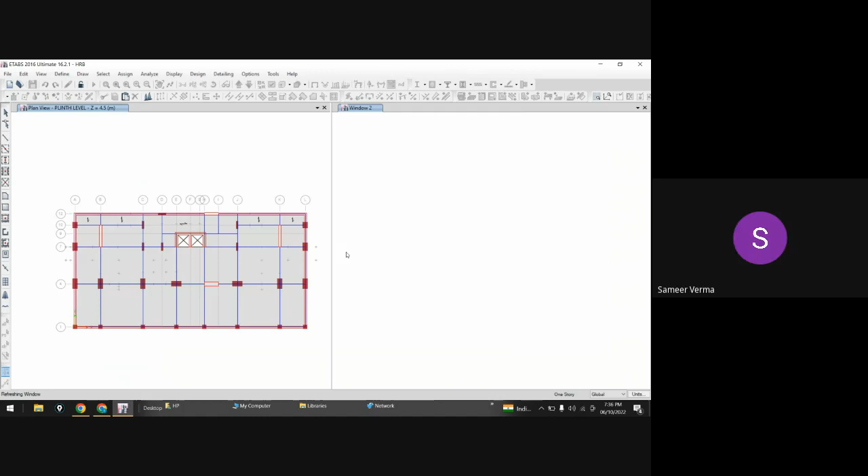Okay, how many of you have started and how many of you have not started yet? Started, sir. I know that Avinash and Sameer must have started it. What about others? Ketan, have you started?

No sir, I have not started this. What is the problem? What is the thing that you are delaying the process? Some problem may be there. Let me know the problem, because unless and until you start doing it yourself, you will never be in a position to see where you are getting stuck, and then I can help you. If you do not start, I just can't help you anymore.

Yes, what about Hema? Hello. Yes, why haven't you started? I started, but not this drawing. Okay, now see, my own problem was...

Don't worry about it. You can start with ETABS tutorials, whatever you want, but it is time now you should start with this commercial project G plus 18. Otherwise you will not understand where you are getting stuck up, and that's why I'm saying this.

And of course, Suleka ma'am, you must be busy in your routine work, but I will just say that you should start. Yes sir, I started but I stopped after doing something because of my office jobs. Yeah, I can continue, I understand that.

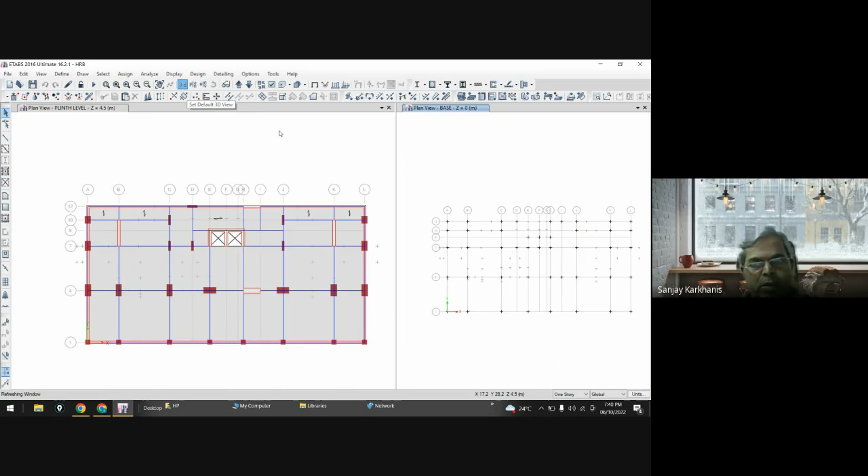So at base, I am choosing a wrong thing - I will click on this window, the left window, because I want to concentrate on the left window, and that left window is activated, and you can see this is the base. Now if you can see, all these plus points are nothing but the supports, and you can right click anywhere to see what the assignments are, under geometry it will be a point.

So you can see that it is a point having x, y, z coordinates. The coordinates may be anything, but it is that. And the connectivity to that point is of the wall.

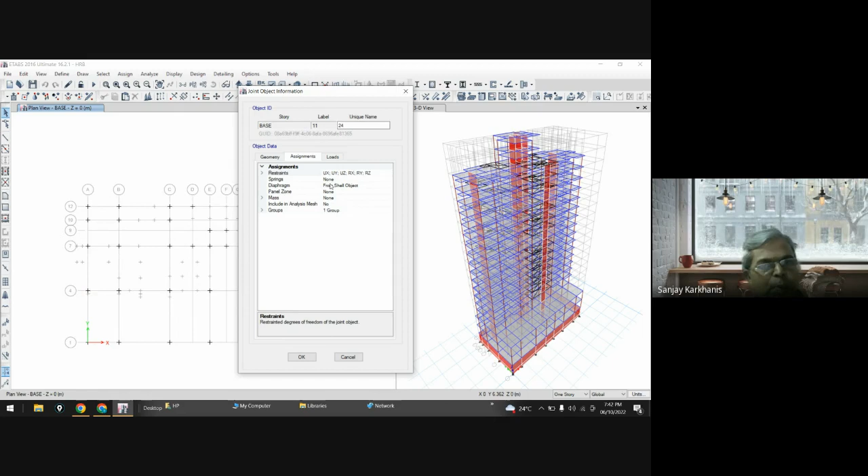So the point you have clicked is connected to a wall, W2, and you can check it over here. In assignment, you can see UX, UY, UZ, RX, RY, RZ, meaning it is restrained to move in X, Y, and Z directions, as well as restrained to rotate about X, Y, and Z. That is a condition we call fixed condition. So this way you can check whether you have assigned correctly or not. You can click anywhere on the point and check it. Here you must get a geometry as point assignment, then connectivity, which is the connectivity of the column or wall depending on the case. That's all about support.

Now all these supports are fixed supports, meaning maybe wall or isolated footing. So they are representing your foundation.

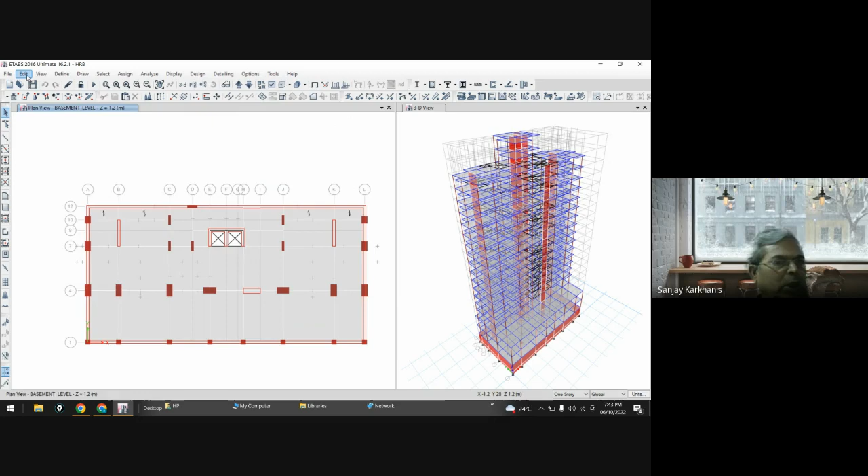Now above that, somewhere you can check the elevation as 1.2, meaning you are having base equal to 0. You can go and see this in edit stories, and if you go to modify story data, you can see all the stories like this. Now you may say, sir, I want plinth level equal to 0, so directly if you see the Z elevation, right now you are getting staircase cap, or let's say this 15th floor, you are getting elevation equal to...

57.7. Now if you want this to represent the height from ground, you can do it like this. Let's say I click over here, which is my plinth level, as 0. Then this one will be minus 4.5. See, at plinth, if I see over here, I am getting 4.5. Now here I want 0, so I will change it to minus 4.5. Clear?

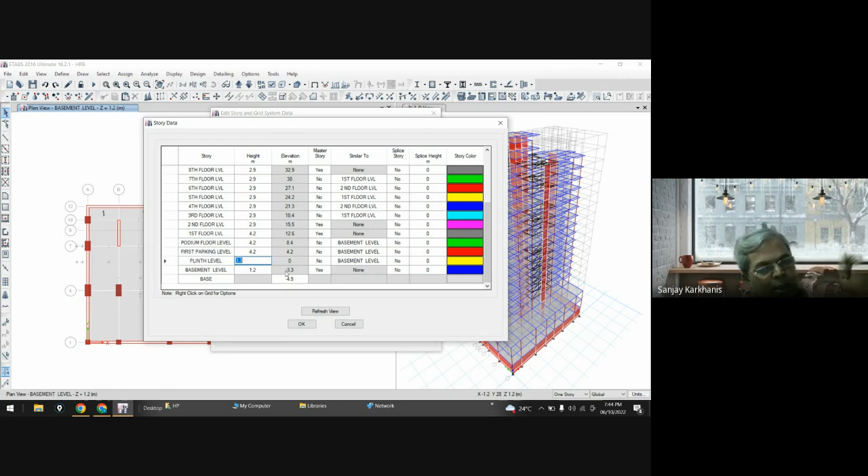Yes sir. Now see, this 1.2, 3.3 as it is, and now you can see that your base is minus 4.5, and your basement level is minus 3.3. Now if you go back in your architectural data and see the elevation, you see that your basement is minus 3.3 and ground is 0. Clear?

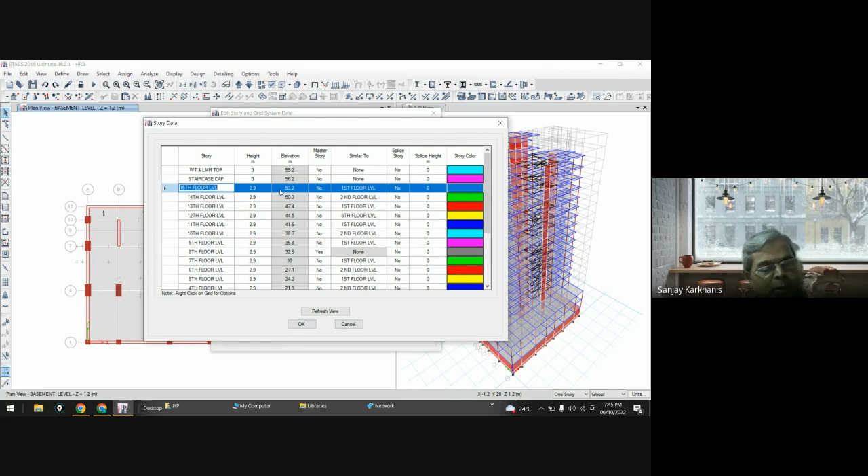Clear, sir. Now the advantage of this is that directly if I go at 15 story, I will get the height of the entire tower for calculation of equivalent height, that is h, to calculate VB. And you can recollect that Ta equals 0.09 h over root d, so that h I will get directly over here. I don't have to go for some addition, alteration, etc. Right?

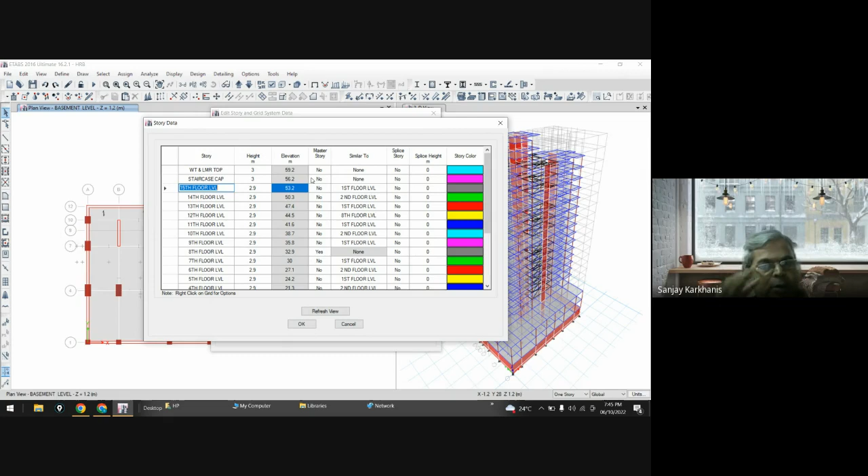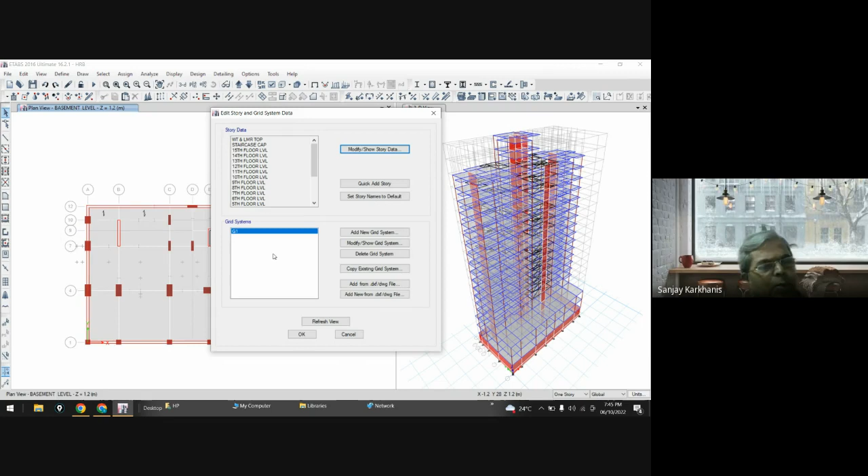Yes sir, yes sir. But this is optional. It doesn't have any reference with your analysis. The only thing is whether you can say your ground is at 4.5, and then you can find out the elevation height minus 4.5, that will be your height of the building. Either you can do it manually or directly convert it in ETABS by giving RL equal to 0 at plinth, and below it will be minus and above it will be plus. So that is a simple trick, and that's all.

Now here you can see at the basement level, you are having the columns, and the columns are not tied because we are not considering any uplift pressure due to water level. But if you want, then you can add the beams into this, so column to column connection, you can connect all columns along with this floor to form...

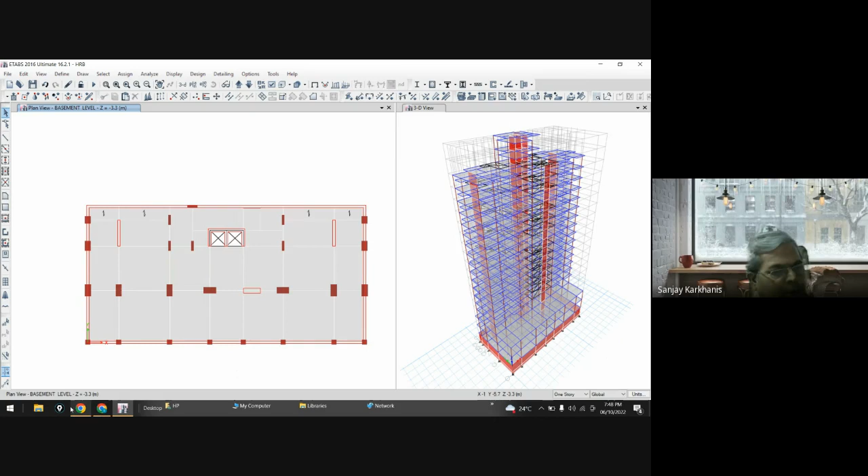Then diaphragm is also assigned. Then you can see over here any other assignment. Right now other assignments are not that important, they are actually carried as default. Then under loads, the live load, under live load pattern you have defined 2.5, and under SIDL pattern you have defined 2.2 kilonewton per square meter as the intensity. And where has this 2.5 come from? Anybody? Live load IS 875 part 2. And why is it 2.5?

See, this is the basement, and on the right side you're having a ramp that goes to the basement. That means you're using this basement for parking—light vehicle parking. So you have to consider IS 875 and see the live load recommended for light vehicles. Why light vehicle? Because in this building you are not going to park trucks and lorries, you are going to park cars, and parking of cars comes under light vehicle parking. Clear?

Yes sir, so under that category you will find 2.5. I think that was explained to you, and I'm just repeating so that if something is missed by you in earlier sessions, it will be recollected. So you can click anywhere and check that 2.5 and 2.2—2.2 is only considered because you may be providing cement blocks or something. Based on that, we have provided 2.2.

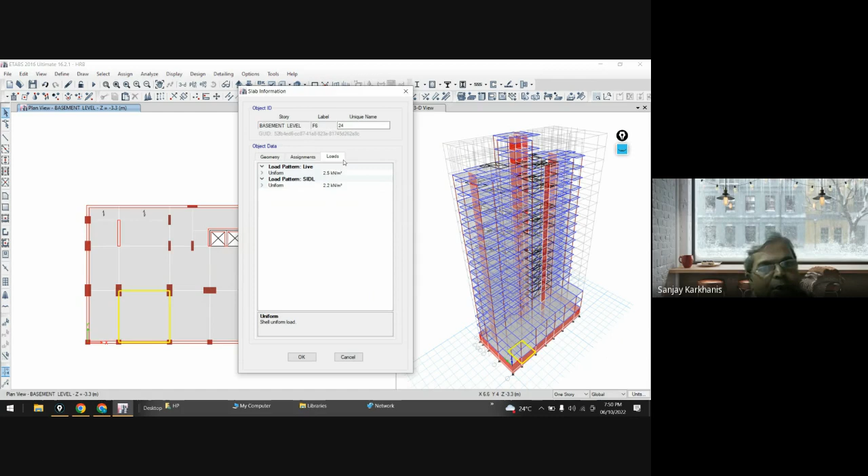So this is one way—every individual element you can check, or you can directly go to display. Under display, loads assign, and under that shell, and under shell you will see a live load category. So here you will see everywhere, under live load category, it is equal to 2.5, and this is your stair area. Here you may provide 2.5 or less than that.

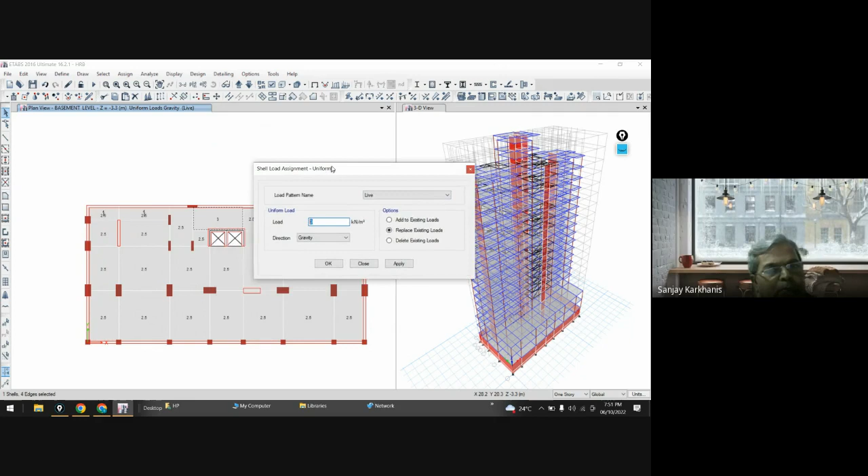Actually this is incorrect, because under this staircase you are not going to provide any car. So you can reassign it. How? Select it, go to assign, under assign go to shell loads, under shell load go to uniform, under uniform go to live load category, and there I will provide the live load category—since this is an inaccessible area I may provide 1.5, but for safety I will provide 2.0 instead of 3. Clear?

Yes sir. Because, try to understand this—this is your basement. From the basement you are providing a staircase, something like this. So under any case, this area is not at all available for parking, right? Yes sir. So that means the light vehicle parking load you should not provide, because you are not going to park any vehicle below the staircase, and that's why I have reduced it.

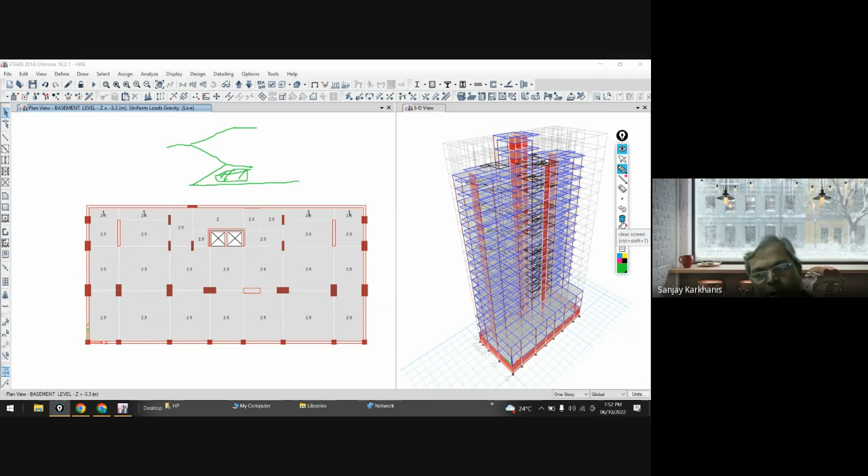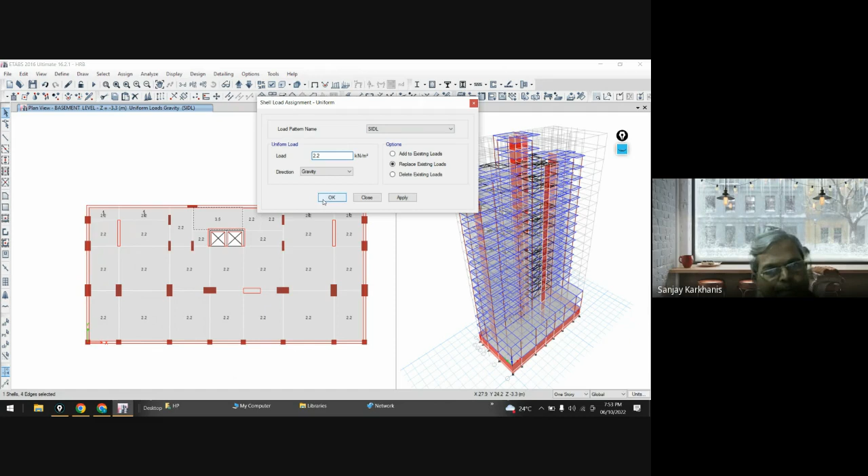So this way you can correct the things also, and that is how you can check your model after completion. Then you can again go to display, under loads assign shell—now this was live, now you can go and see SIDL. What is the case for SIDL? Everywhere you have considered this, and this has been considered as 3.5—actually this will be 2 only, so 2.2 only. You can make it like that: assign shell load uniform, and under SIDL you will provide it as 2.2.

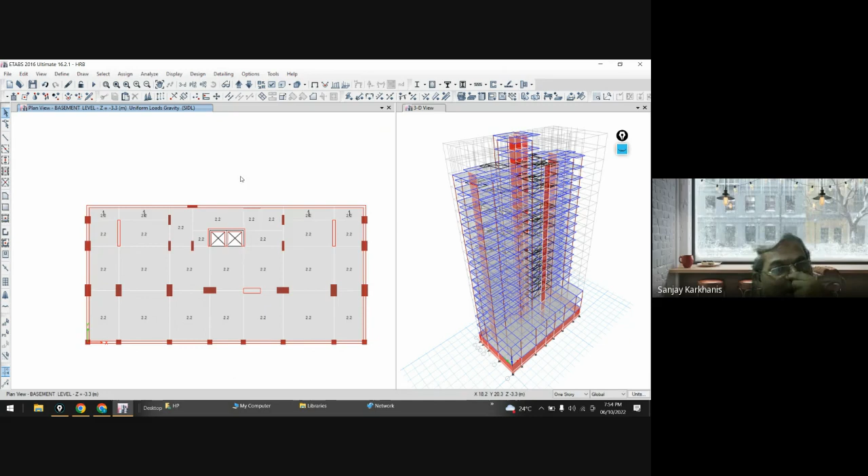Okay, so this is all about the basement. Now what about the beams? You will see that the periphery has a retaining wall, fully from basement or footing up to the ground level—you are having this RC wall. That means there is no way, or you should not provide any loading on that, and the self weight of that element, as it is a structural element, will be automatically calculated by ETABS at the time of analysis.

Then you can go one step up—now this is your ground level, right? So what is the situation at ground level? The same situation—ground level is also used for parking, and here you can see this is your staircase. So here you use category 3 for live load, and 3.5 for SIDL, that is weight of the steps etc. You can calculate and assign that. For the rest, SIDL is 2.2 and live load will be 2.5. Again, what about this?

What about the wall? Or what about the frame? It is now composed of beams, and under beams you will see that we have not provided any loading. Is it correct, or do you want to make some changes into it?

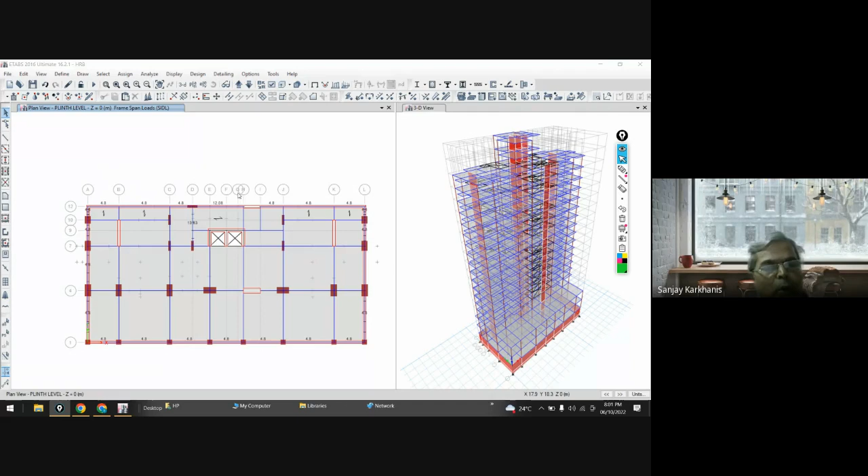So whenever you have some doubt in your mind about the magnitude of load, or about whether the load is there, you should consider it or not, then always consider it instead of not considering it. Because then if finally there is no load, then your estimation will be on the higher side. And if there is a load due to wall or any other thing, then already you have considered it, so you are always on the safe side.

So that is the advice based on structural criteria. But if you are going with the economic criteria, then your criteria will change a little bit. But that is not the case here. You have to go with safe considerations. Okay.

Yes sir, if you see this, this load shall not be there because there is an opening for the lift. So here also the opening is not considered, you can consider that.

Now you can see this is your first parking level. Again here also, as it is a parking or first floor parking, only periphery loads are available, and the periphery will have a loading of parapet wall, which you may consider made up of RC material or some other material.

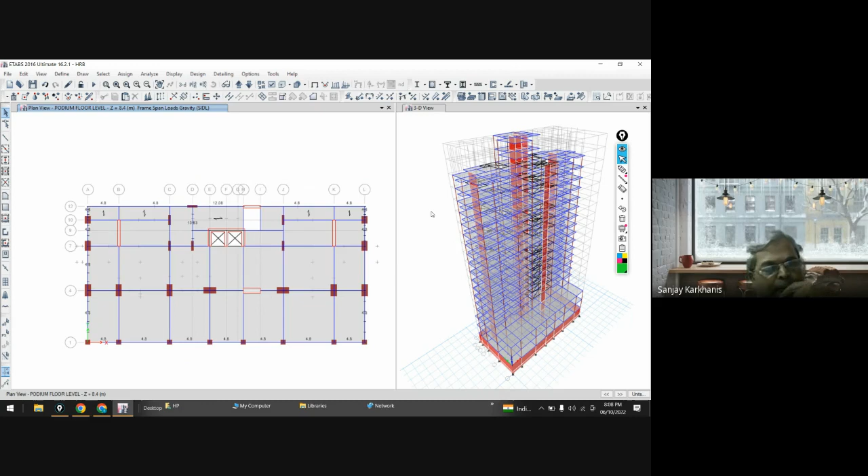Yes sir. When you saw that architectural drawing, you might have felt this is beyond me. Now you can see how simple it actually was. It was not complicated at all, it just looks complicated, and that's what I always try to highlight: things that look difficult are not necessarily difficult. Never feel that whatever seems difficult is actually difficult. Actually it is easy, that's exactly why it looks scarier than it is.

Yes sir. Okay, then we'll go one step ahead. So this is about the podium floor. Now here you can see it starting, and this is also to be deleted. So at every floor you can delete that.

Now you can see the first thing. First I will assign clear display so nothing extra will be shown, and then I will try to see the loading on the flat. Now you can see this is one flat, this is another flat, and this is the opening over here. This is a common corridor, and these are the alternate terraces. So I can go and see things with loading.

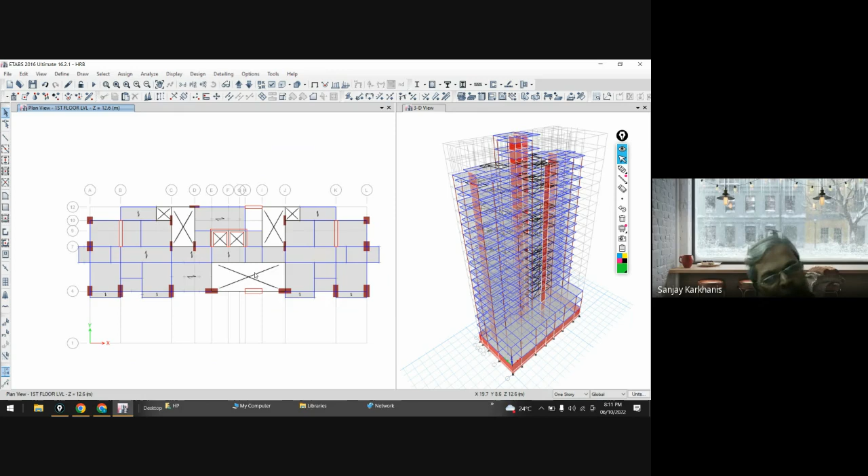Now yes, let us go and see the section. If you want to see the section, you can right click and go to assignment. So this is S135, a slab of 135 thick. Then if you go somewhere here, you will see it is again a slab of 135, a two-way slab.

And if you see the slab for the staircase, the staircase slab is ST200, or you can check this. So this is again a one-way slab with 135, and you may design the slabs and place the depth accordingly. It's not necessary that every depth is considered as 135, because you may decide this slab doesn't need 135, so you can provide 125. But if you want to provide the slab as 125, you will have to check whether you have defined it.

So under section properties, under slab section, I can see that I have not defined it. So if I want 125, I will have to define that slab as one-way slab 125. And again, you can go back and see the GA drawing, and whatever has been considered on the GA drawing, you may apply it over here. Right? Clear ho raha hai?

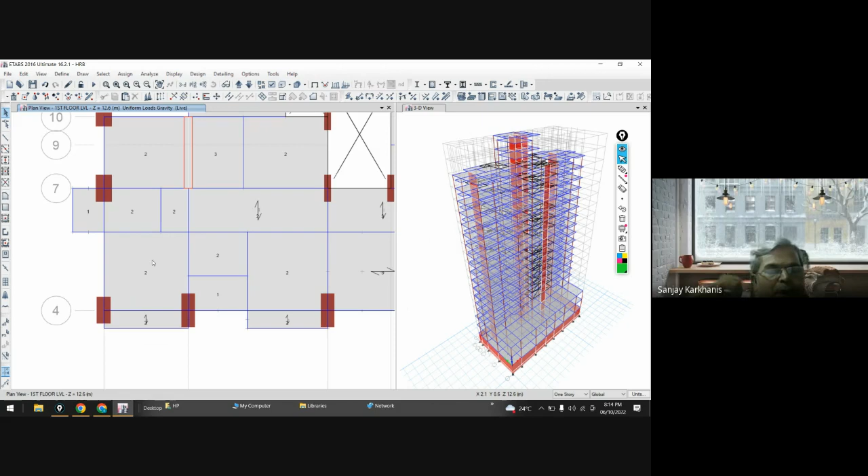So if you go and see the codal provision, the code says that if the area of the slab is something like a chajja, and it is inaccessible, then you can provide live load intensity of 0.75. We have not gone for 0.75, we said let us keep one step higher, and that's why we have considered it as 1.

Okay, then this is bathroom, so everywhere in bathroom we have considered it as 2, and balconies - now these balconies, it depends on you how much load you consider on them. If you consider the balconies susceptible to overcrowding, you can go for 3, otherwise you can consider 2. Again it depends on you - if you consider 2 it is okay, if you consider 3 it is still okay, right?

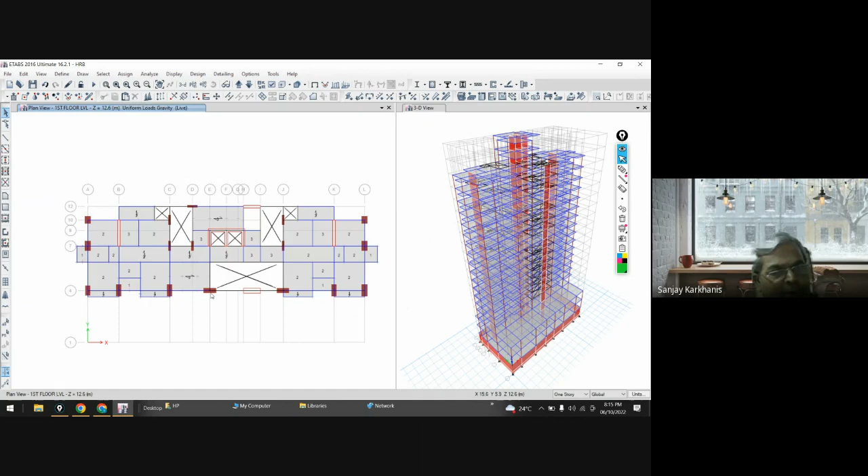Yes sir. And this passage, that passage, you can see we have considered live load equal to 3. So this is the passage, then this is your staircase. So the live load assigned to all these floors is correct.

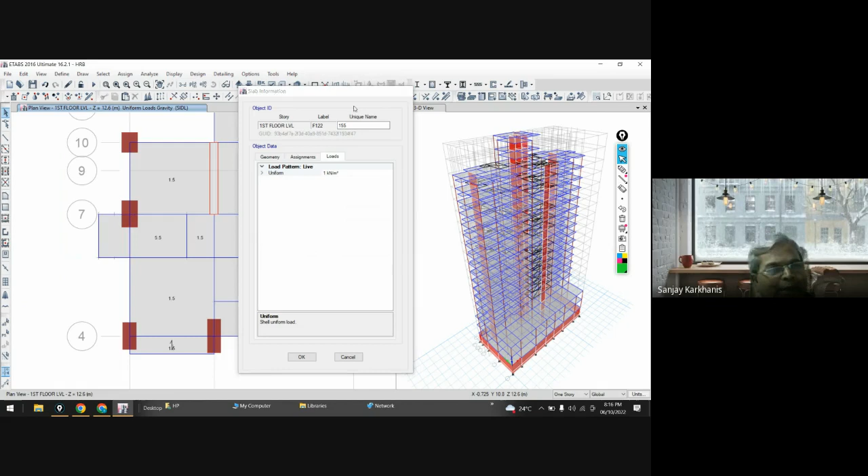Now you can check the dead load assigned to shell. Under shell, you can see SIDL, and SIDL will be a little bit different. Here SIDL is considered as 5.5, while there is no SIDL on this slab. You can check, there is only a live load, no SIDL, or it will be very less, and that's why we have not considered it in these areas. You can check the drawing and you will see that here there is a ledge only for placement of your

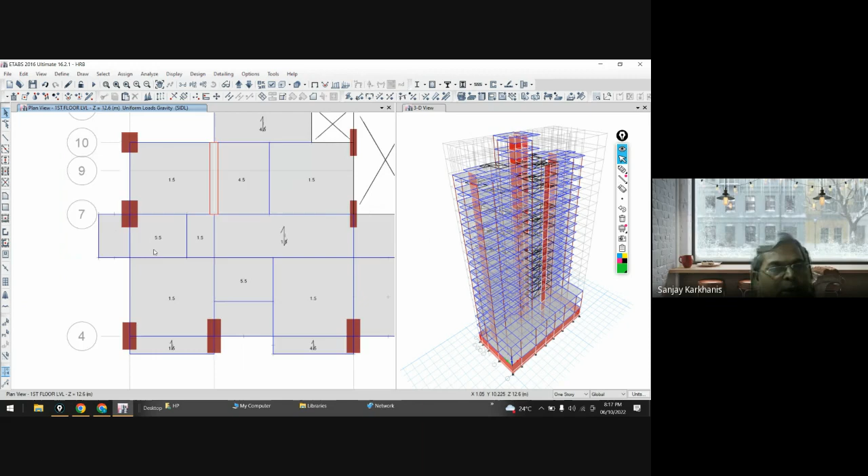AC instrument. And then in the balconies, you can see 1.5. Then this is a dry balcony, that's why it is 4.5. This is the bathroom area, it is 5.5. You can calculate and place your load as per your calculation.

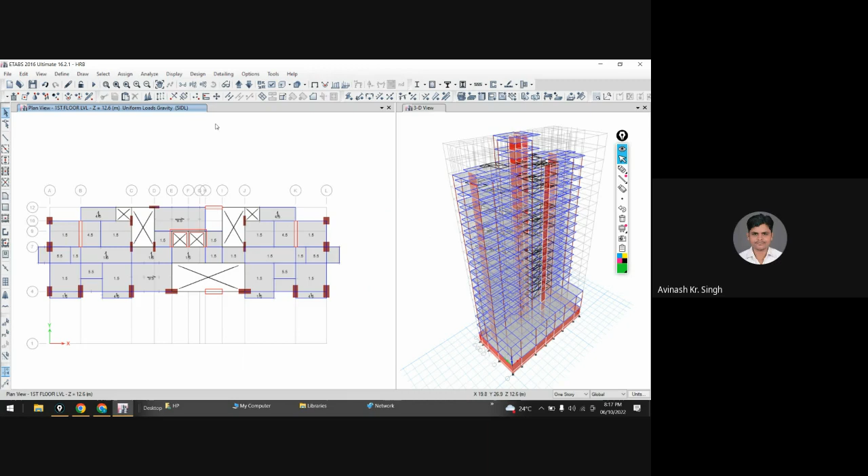So it is up to you, right? The only thing is that whatever loading you are considering, you must be in a position to justify it, right? Yes sir. If someone asks you why you have considered this, you must have the justification. Now whether that justification will be accepted or not is a different thing. But you can say, according to me, I have applied the loading because I consider it like this.

Okay, so similarly you can go and check the loads assigned to frame sections. Under frame sections, only SIDL has been applied, and you can see the SIDL. Everywhere SIDL is different. If you want to consider exact things, you have to correlate this loading with your architectural drawing, whether there is a wall or not. If the wall is there, what type of wall, what thickness, and what is the height of the wall, whether it is a parapet wall or a 50% wall. Accordingly, you can find out.

Now you know the input DBR, we have gone through it in very detail. So you know how to find this out, and don't go for 3 digits, that is not at all required. Why it has been considered, I don't know, but don't go for 3 digits. So 7.5 or 7.2, whatever, one digit is more than enough. Don't go for 3 or even 2. That is just your academic consideration, and it has nothing to do with practical things.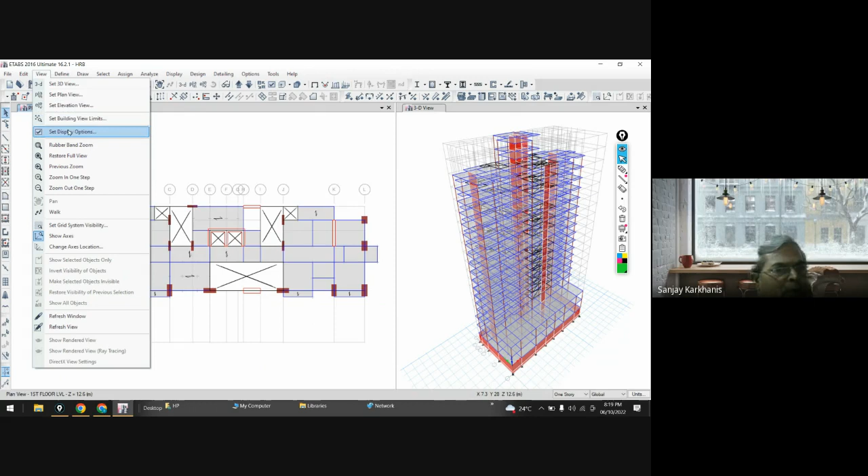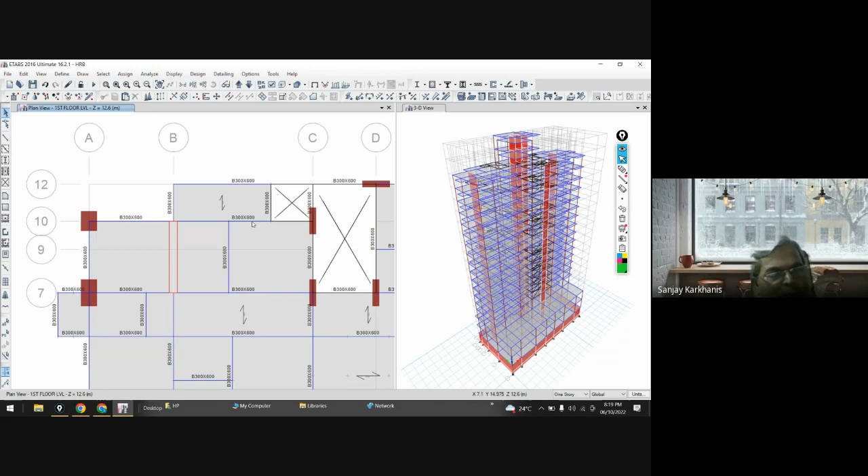First I will clear the display of assign, and then go to view and set display options. Under display options, under object assignment, and under frame assignment, I will go for section, and I will see the various sections. So the beam, beam 300 by 600, this is the exact name that you have provided under section properties, under frame section, all these names, whatever you have provided.

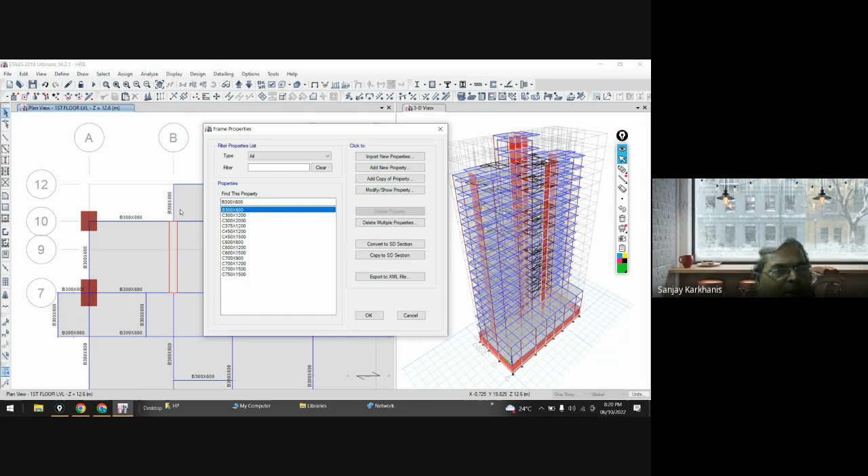So if you provide a name over here, something different, then it will appear like that. So if I consider this as B1, it will show you B1. Okay, so name of the section, right? So label is different, section is different. Let me show you that. So display options, object assignment - see the section is different, and if I go for label, the label is different.

Now who is defining the label? Program ETABS, who is defining the label? ETABS program. Yes, now you are on the right track. So the program will decide the name.

The only thing is, whenever there is some error and the program says that one beam B1 is overlapping with B4 also, that time you can consider. So this is my B1 and this is my B4. Now let's say in my drawing, instead of ending here, it has ended somewhere here, and this beam has started over here. So there will be overlapping. That overlapping is detected by this program when you ask it to analyze and check model - that time it will give you the errors.

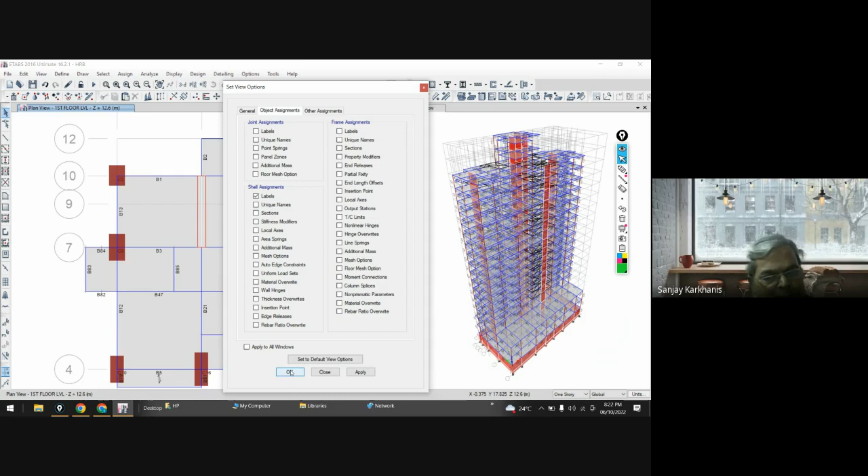First, I will clear this label, and then under shell assignment, I will click on this label, and you can see here now F74, F116. These are the labels at the time. This is how your drawing has been performed. It's not necessary that if you see F25 here and you are creating your drawing, it will match, because how you draw, or what is the sequence of drawing the slab, accordingly the labels are considered, right?

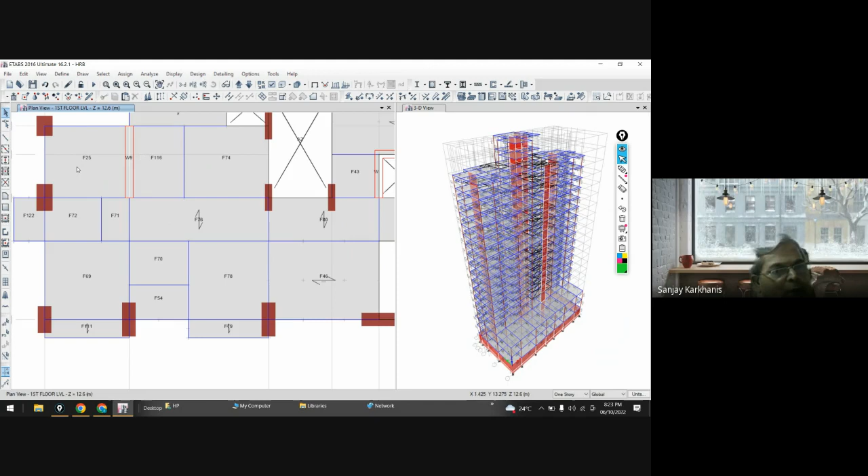So I cannot say why it is F25, because this is a label that has been monitored and controlled by software. So it is not in our control. Don't worry about that. You can say that this is F25, that is a slab. And you can check the assignments, you can check the geometry, and you can check the loads.

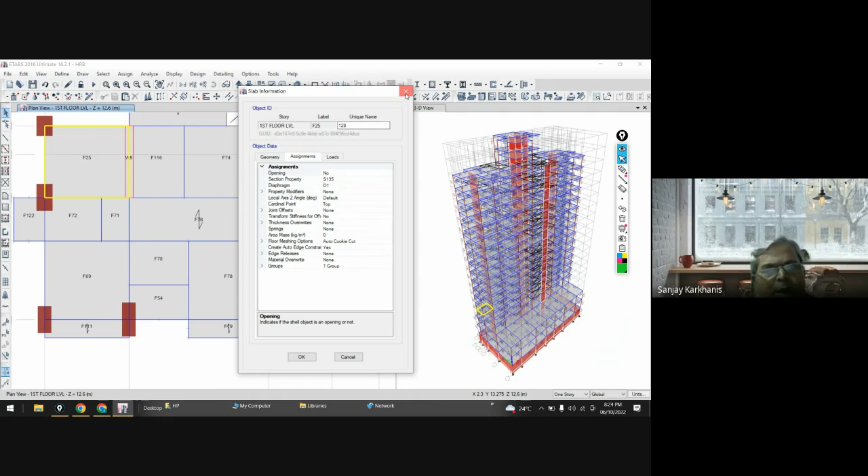And here you can see that F25 is coming. Then unique name is 128. Then the label has been defined as F25. And what is the name of that slab? The name of that slab is S135.

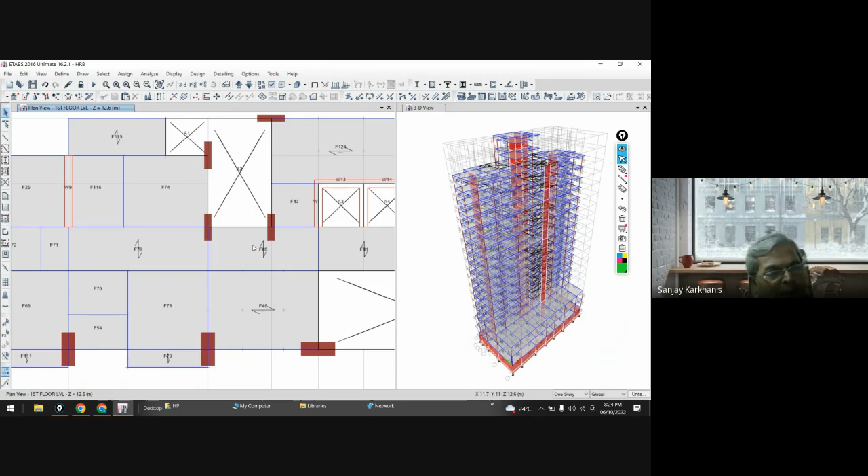So why I'm showing you all these things, because these things you will not find in any YouTube video or book. You will find n number of things, but nobody will tell you what is the meaning of this, how it has been coming. All that you can get only when you will go to this help and go to frame object or shell object. There you will come to understand how this is coming or what is the meaning of this.

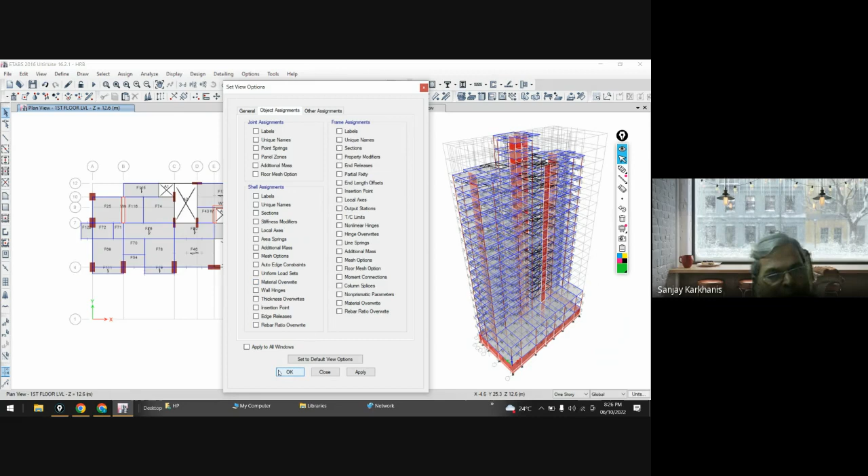Okay, then I want to remove this, so I will go to set view options. Under display options, under object assignment, labels, I will clear that, and you can see it has been cleared.

So this is how you can have the loading. Similarly, you can go and see, except this, everything is same. Now again you will have to delete it, right? So what I will do, I will go one step up, to this one story instead of all story, and then I will select this and delete so that everywhere it will be deleted. So we were over here, so it is second floor, then second floor will be also identical.

So I will not waste much time into it. You can verify everything, or shall I let you know? The only difference is this, with this L - now this is L and this is slab. So this is void and this is slab. And if you go below, this is void and this is slab. So that L part is different. Otherwise, everything else is same up to.

You can go ahead and see the eighth floor. Now this is your eighth floor. And now the eighth floor is having this. So you can check, this is the only slab that you are going with.

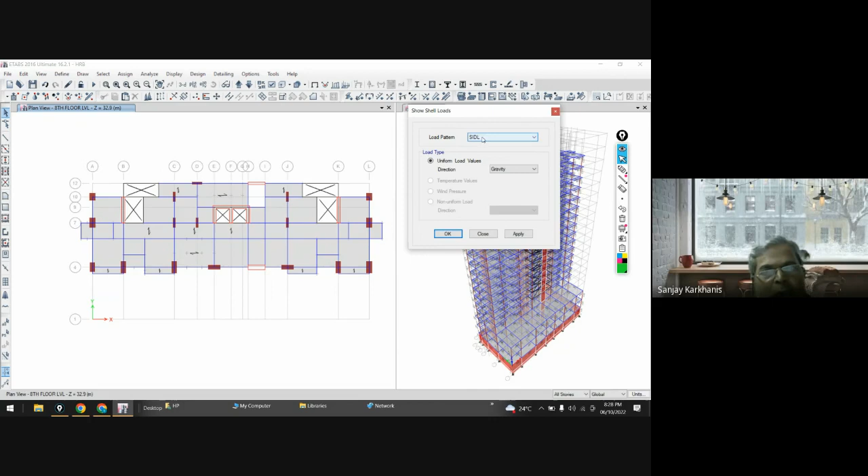That means this is an area subjected to overcrowding. It's something like a terrace or balcony, and being subjected to overcrowding, the SIDL needs to be checked accordingly. A wrong SIDL has been considered here, so we'll have to change it. This 1, 2, 3 is not SIDL, I'm talking about live load, so I have to go and check the live load.

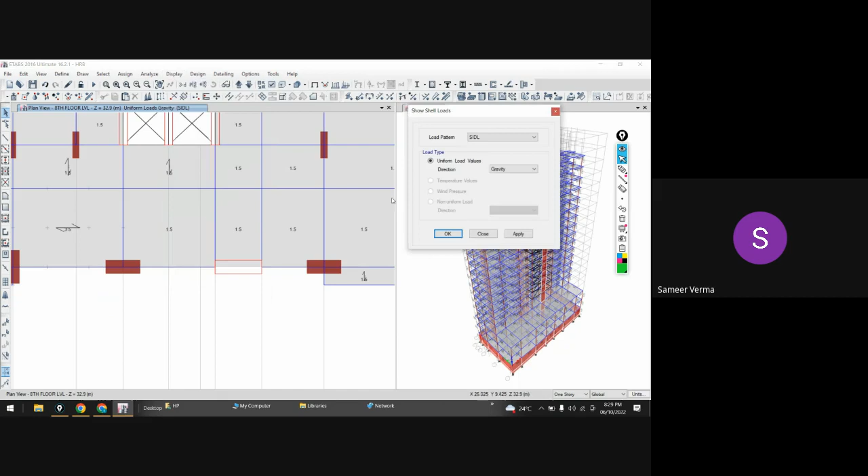But to be on the safer side, I will consider this as 3.5 because this is a huge terrace, and you may consider 0.5 higher than whatever the codal provisions suggest. This is not repeated at every floor level, so finally there won't be much rise in the loading.

So that's why I may go for 3.5. Instead of that SIDL, I will change it to 3, then I will make it 3.5 and replace the existing value. So 3 will be replaced by 3.5. Now you can see that. Okay, SIDL, you will say the same.

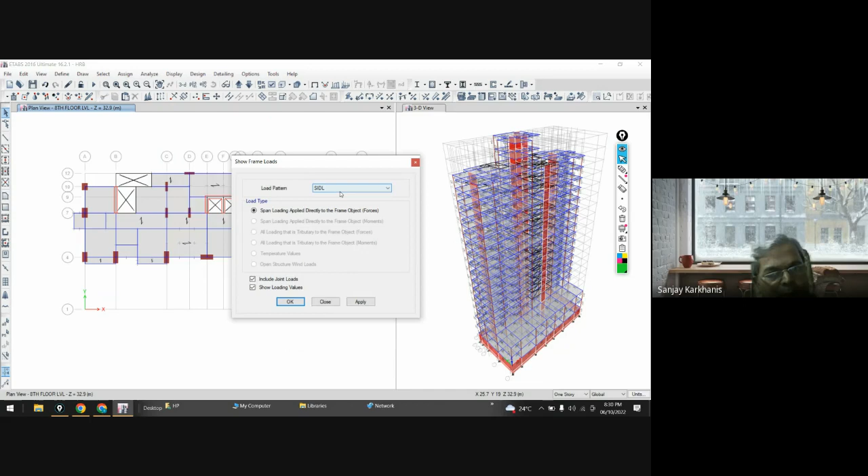And what about this? Let's see what load has been considered for the display, load assign, frame, under frame, SIDL. SIDL is rightly considered as 2.5 because here it will be a railing, not more than that. It will always be a railing, because it is easy for outsiders to enter this area once they have a ladder up to that floor level.

Rest of the things are as usual, they are the same, so I'm not going to repeat it. Then, okay, I will save it.

And then we'll go one step ahead. So this is okay, this is also okay, this is also okay, and this is your 12th floor. And again 1, 2, 3, and I will assign shell load uniform under live load category 3.5, replace, and okay. So that is 3.5, and then under loads it is 1.5, that is okay.

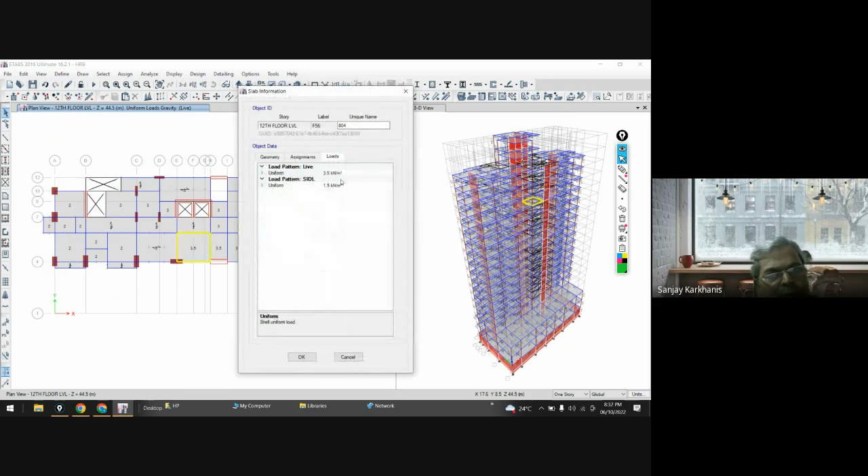So the SIDL is okay, then this is also okay, and you can see all the other things are the same as everything. And then you can go one step higher.

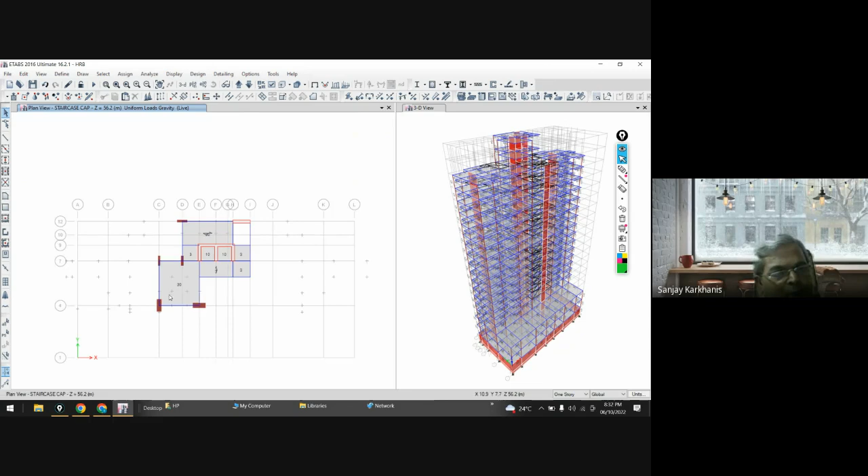And this is your lift machine room, and you can check that the lift machine room has a live load equal to 30. This is a staircase with water tank, again a staircase with water tank. So you can see 30 and 1.2 — these are the loads because that is subjected to water load. So there are 30 and 1.2, and these are your values.

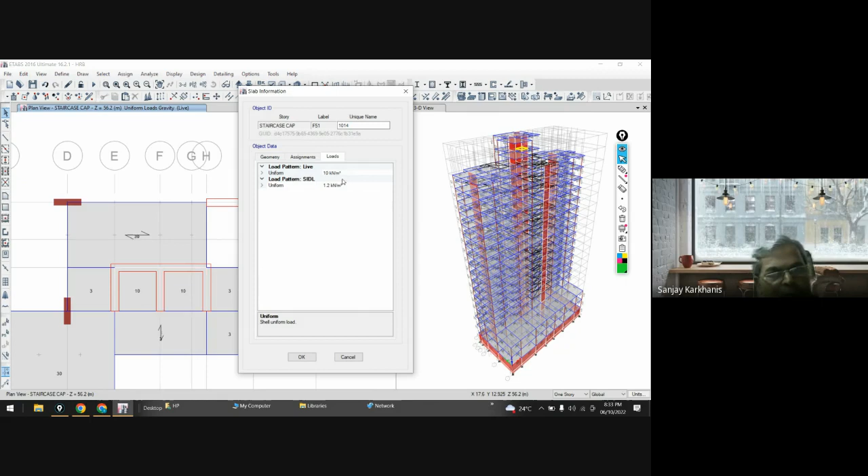So 10 and 1.2, and now you must provide this. I think you have to provide a slab over here, because it is the top of this, so whatever the property is, you can provide it. So 10 and 1.2, and under assignment S135. So you can provide a two-way slab over there, so let me provide it.

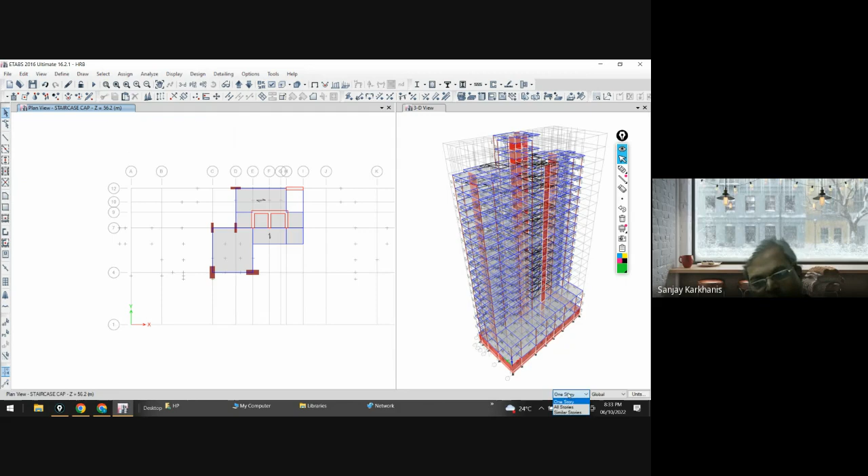Assign clear display assign — let's see why it was deleted. At the time of deleting, we had considered all stories, and that's why the slab which was available over here was also deleted.

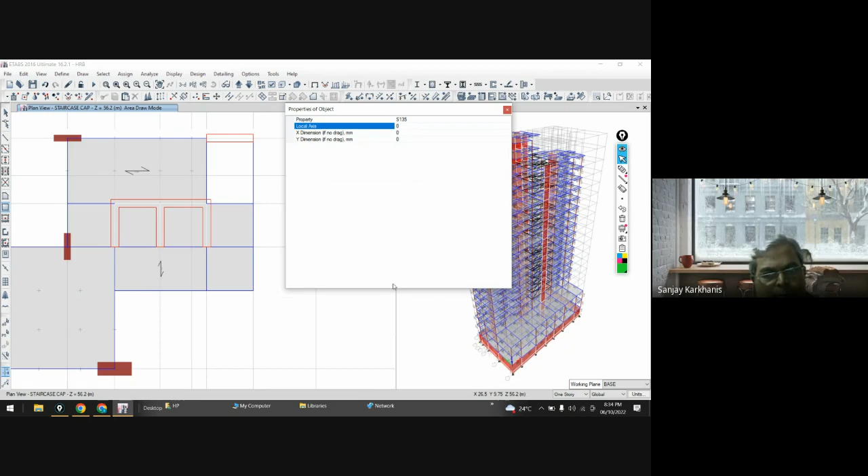Now we'll add it. So you can go to draw, under draw go to draw floor, and under that go to rectangular floor. Under rectangular floor, the property you need is S135, local axis 0. Consider it like this, and then you can draw either from this point to this point. Okay, so the property is defined.

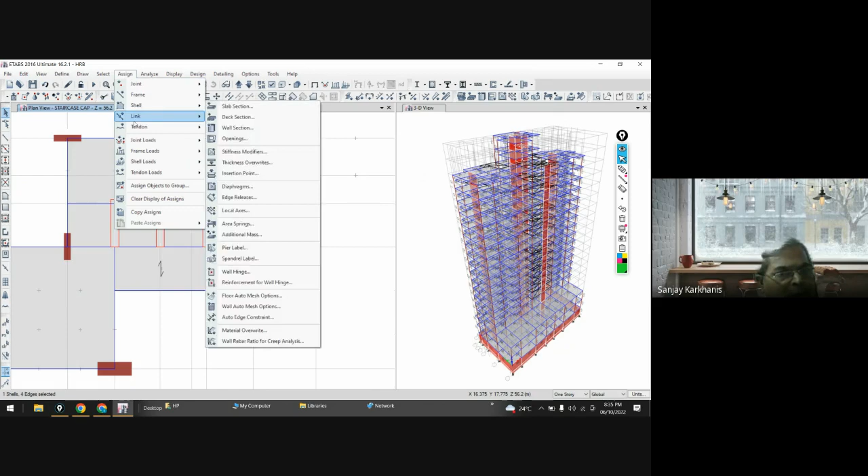Now you have to assign the loading. What is the loading? You can see the loading on that is 10 and 1.2. So click on it, go to assign, under assign shell load, under shell load uniform, first go for live, which is 10. Then again click, go to assign shell load, under shell load uniform, and then go for SIDL, and now it is 1.2.

So this way you can complete your entire drawing, and here also you have to provide it, but here you will not provide that.

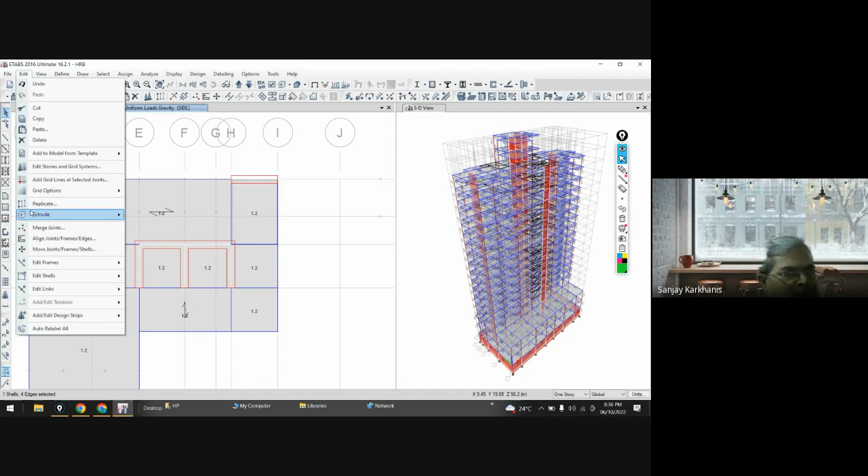So live load pattern 0.75 and 1.2, the same will be applied over here. So I will make one thing. I will select it and draw it, go to edit, then replicate and story. And let's say I have to define it as lift machine room. So I will apply, close, and then go to lift machine room, and you can see this is applied.

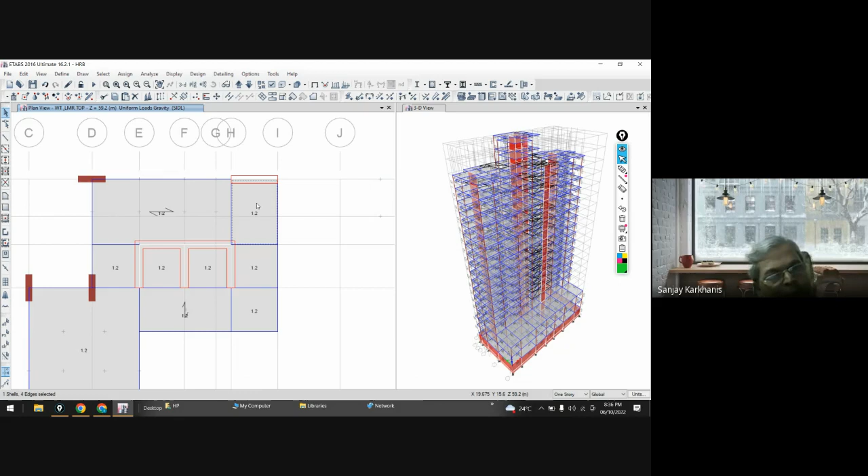Now this is 0.75 and 1.2. That means I have to change the live load as 10 equal to 0.75. So you can select it, go to assign shell load. Under shell load, go to uniform. Under uniform, again go to live, and then say 0.75. So these are various ways. By any way you can create it, add it directly, or use the slab below, and you can replicate with the floor.

The choice is with you. Okay, is this clear? Clear, sir. Any doubt? No, sir.

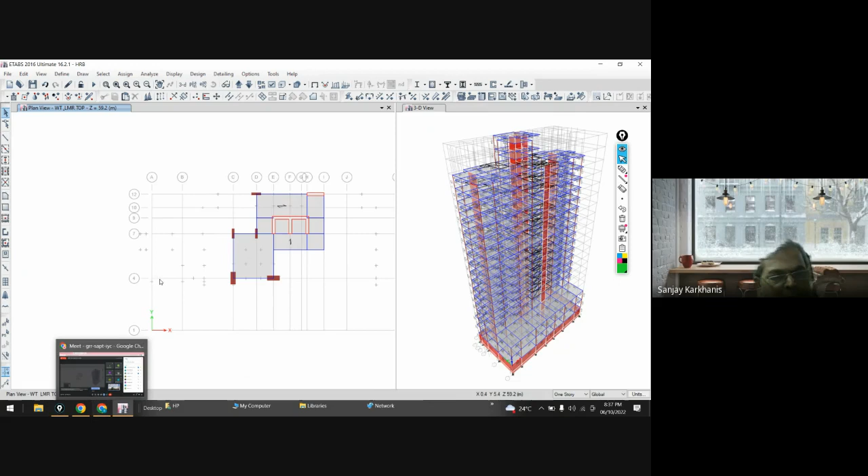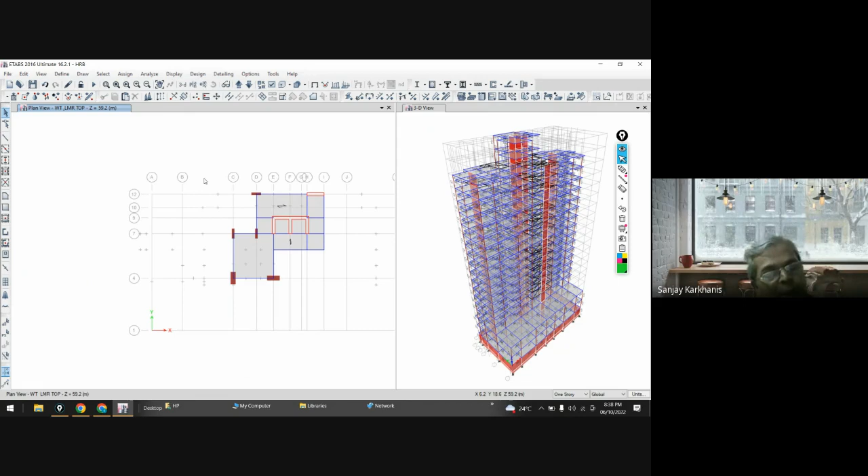Okay, then I will say that will conclude over here today, because next time what I will be doing is I will open this, and straight away go to analysis, and ask it to analyze the structure. Then we'll find out that response, that scale factor, and we'll revise the scale factor, and then go and see all the designs. So not designs, first we'll go to analysis results, and check it with our codal provision. Clear? Yes, sir. Yes, sir. So that's why today I don't want to start with that, because then it will be a discontinuity. So it is better to start day after tomorrow.

So we'll be having these 3 sessions, in which I will be dealing with how to see the results, what is the meaning of that result, and if you want to change the result, what are the ways that help you achieve your target. Right? Yes, sir. Okay. So if you are having any queries, you can ask me, or we'll conclude today's session.

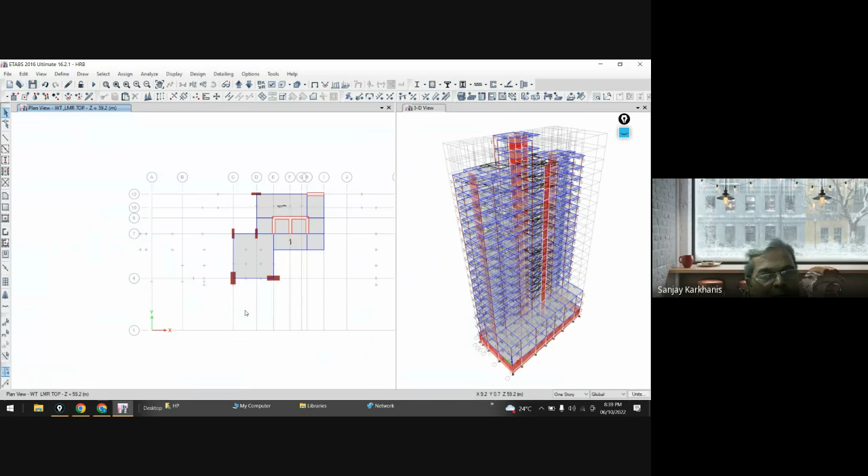See why we are not, let me go back. See what was happening when we were creating a wall over here and wall over here. The torsional issue, we were not in a position to remove the torsion, and torsion in first mode is not at all accepted by codal provision.

So if you do not want to consider the torsion codal provision, then it is the responsibility of the structural consultant for that. So that's why we discuss the things with architect. We have discussed the things with the client, and finally we arrived at a decision that we will not provide that wall.

Instead of that, we will provide AAC masonry, and if required, provide openings for that. And if not required, then we'll provide that AAC masonry with the beams at every floor level. So this wall and this wall were connected with a beam at every floor level. So this was middle. See what was happening, the staircase was resting at mid level. So there was a middle level beam as well as a floor level beam. Yes, sir. Okay. So finally, architect agreed.

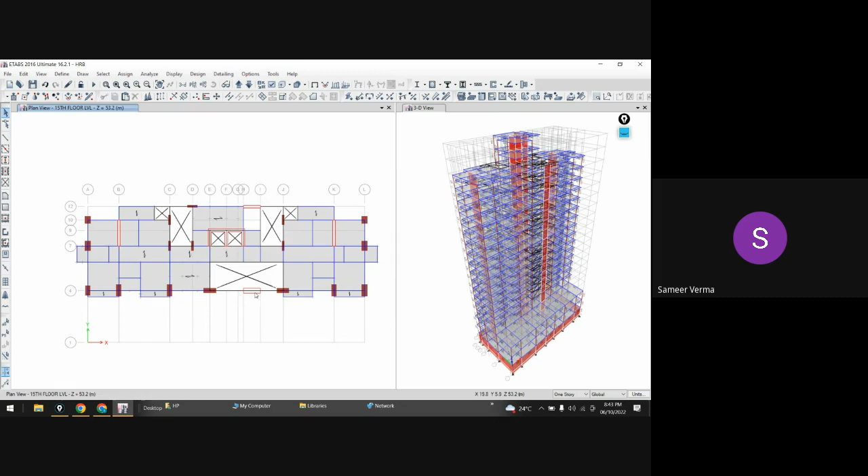Normally there has to be a wall, but this wall was not balancing, or we were not in a position to have a balancing effect for these two vertical members. So you can see this is a wall, and this wall is balanced by this column, almost the same.

Yes, after placing this only could we control the torsion. So this is how the things are running. Initially we had a column over here also, a wall over here also. But if you go in the parking, you can see what is happening.

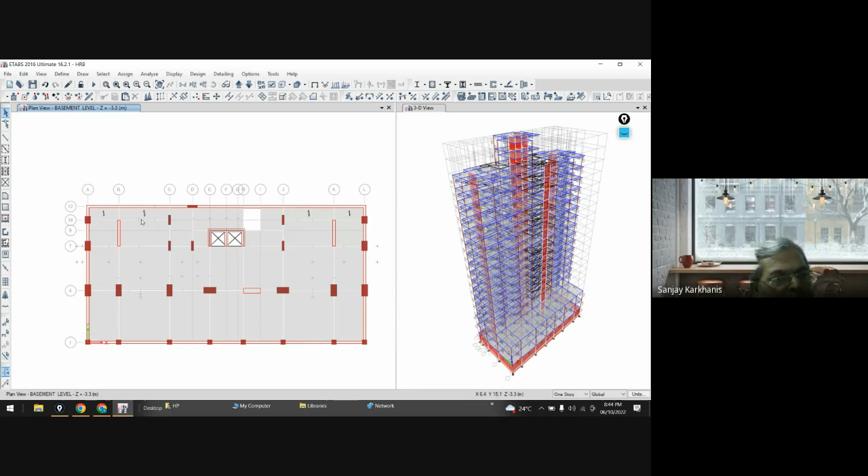If I go to basement level, see here, actually that wall was coming somewhere here, and because of that, the architect was saying that he is interested in providing two cars over here. So that's why the wall over here was deleted. Otherwise, you could have provided a wall over here.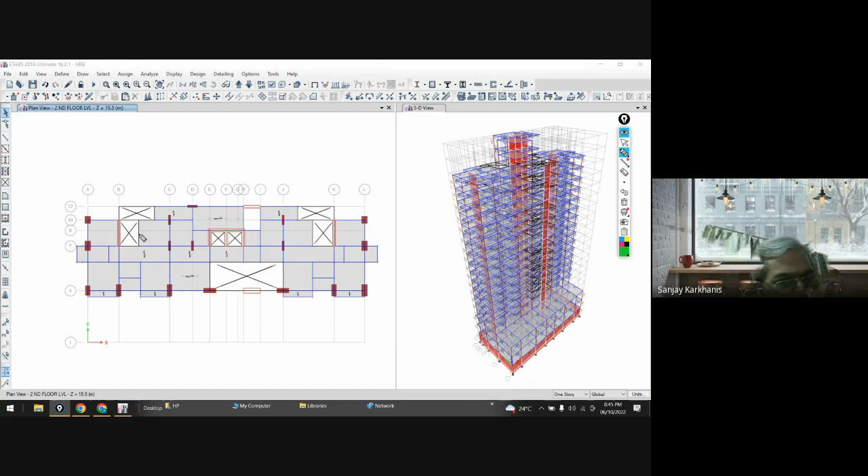So if I provide a wall over here, actually, I was asking him that at least give me a column something like this, a column over here and a column over here. So it was somewhere here.

So this was our demand for the two columns, but it was finally turned down for their requirements because they wanted cars. Actually, the total number of cars, the parking facility for this building, was not matching. So finally, we said okay, we'll remove this, and we'll make this heavy.

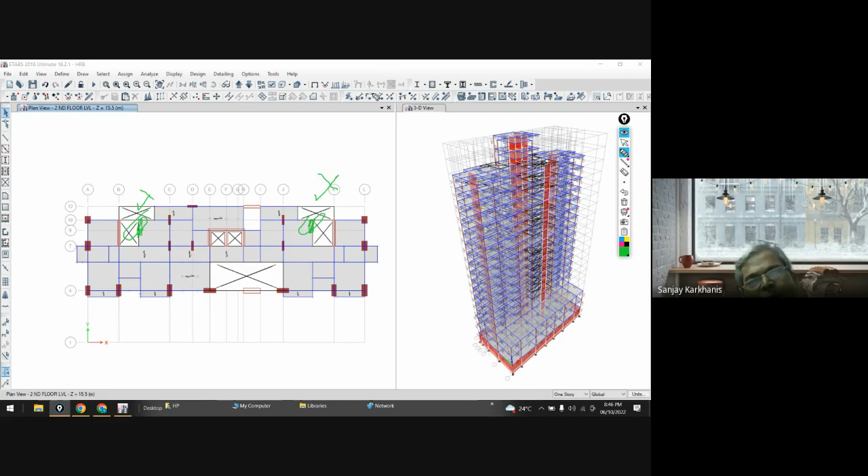So these are the further points. But right now, I will say that you can understand all these things later on, provided you are at least able to create the structure, analyze it, and find out what should not be there and what should be there.

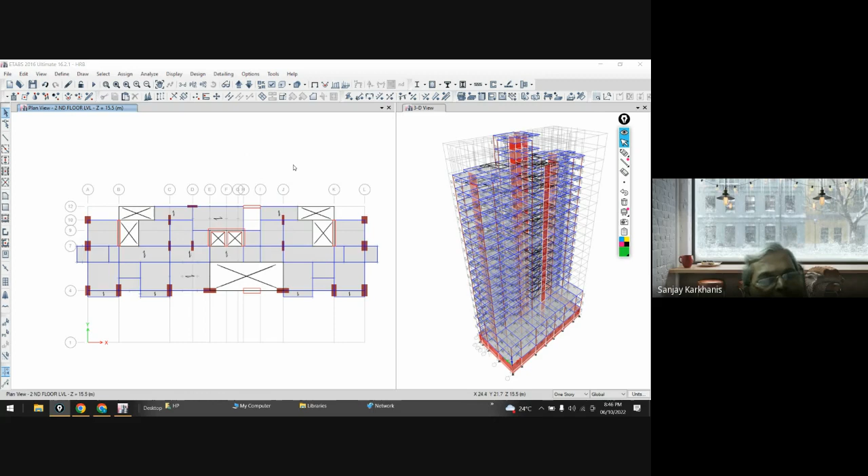If that much you understand, then when you go to practice, definitely you're not alone over there. There will be your boss who is having more experience, so he will guide you at that time. So don't worry about these small things. But the boss will guide you only when you're qualified enough.